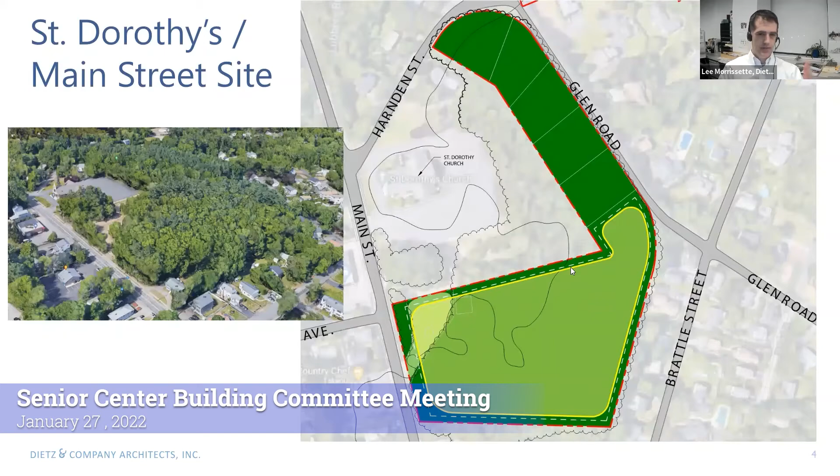As a reminder, this is the preferred site test fit that we did. It's up on the street, on Main Street, with the parking behind it, internal to the site. The entrance is to the north, so up on the screen is north in this case. The entrance is to the north of the building, then swings around to the right facing east. There's an exterior patio space facing south and some blocked-in potential for outdoor activities adjacent to the building, as well as adjacent to the parking. This is really just a test fit, so there's future expansion potential next to the street as well.

I'm reminding you because we're going to zoom in and keep the orientation the same, so up will be north and right will be east, and so on as we zoom in. Just keep the site in mind, because the screen's only so big—we can only fit so many things on.

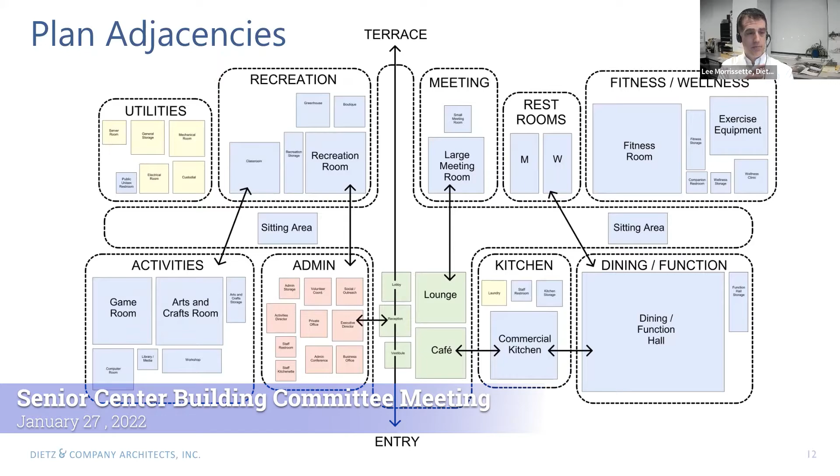So if we go from a loose association of spaces to a preferred association of spaces, we now move into something that begins to look a little like a building. So we have two plan diagrams, deliberately named number 1 and 2. It could have been A and B, and we'll make more, but just to keep track of which one's which, we have plan diagram 1 and plan diagram 2.

The spaces you see here are colored like we talked about, and are actually pretty accurately sized to that plan diagram from the summary of spaces before. So we've begun to group things, and I think that's something to note.

So we've begun to group spaces together based on the plan adjacencies we talked about previously. For example, the fitness room and the exercise equipment room both have their appropriate associated storage rooms within them. For the purposes of easy design, we've grouped all of the support spaces together. For example, the kitchen has the kitchen's office and storage and that kind of thing.

And so forth. As a result, we can begin to think of the plan as kind of four things, really, maybe five. One, admin, a suite of offices, has conference rooms and office space in it and all that kind of stuff, but it's really a chunk of administrative space.

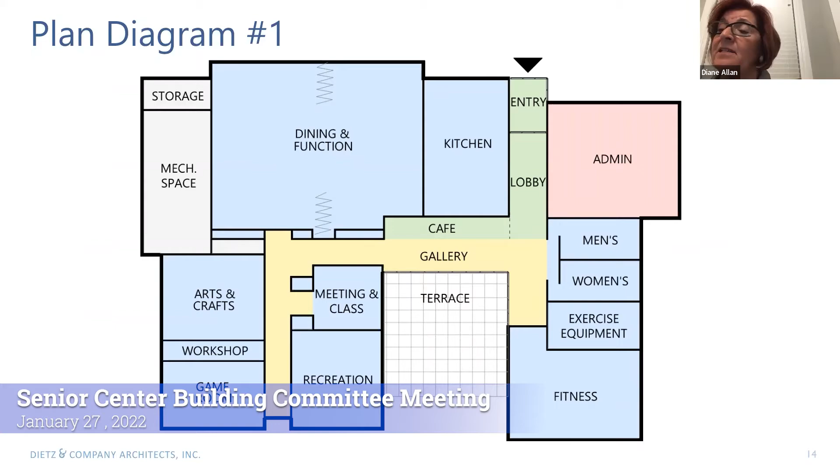That's for sure. So the other thing I'm thinking about is with this flipping of the dining and function area there, especially if you have a large crowd, it's going to be perfect where the restrooms are right across from it. And rather than, they seem to be a little more centralized in plan 2 than at the far end, where if you're way down at the game room, you've got to walk all the way down to the end. So they're a little more centralized there.

And one other thing is I was looking originally at the original plans we were given here, and we had asked for a scale here, and the scale on it just doesn't match up. I'm trying to visualize the size of this building, and what you had here, the 1 inch equals 200 feet, doesn't quite match the bar scale at the bottom.

You're absolutely right, and I do apologize for that. It was a last minute oversight. We did this plan so it fits on the screen and maximizes on the screen. We can put a graphic scale on there for when it gets printed out. It was an oversight, we will definitely fix that in the future.

And we don't have any doors. Sometimes doors help, or stairs, because we know how wide a door or stair is, and so we left you adrift there unintentionally. The best way to describe it is, the space between these two walls going into the bathroom is about 4 feet, so that's a little wider than a door. This entry vestibule is about 12 feet wide, and this yellow section here is 12 feet wide. That doesn't really help, but we'll get a little more thinking on the dimensions of the building, Diane.

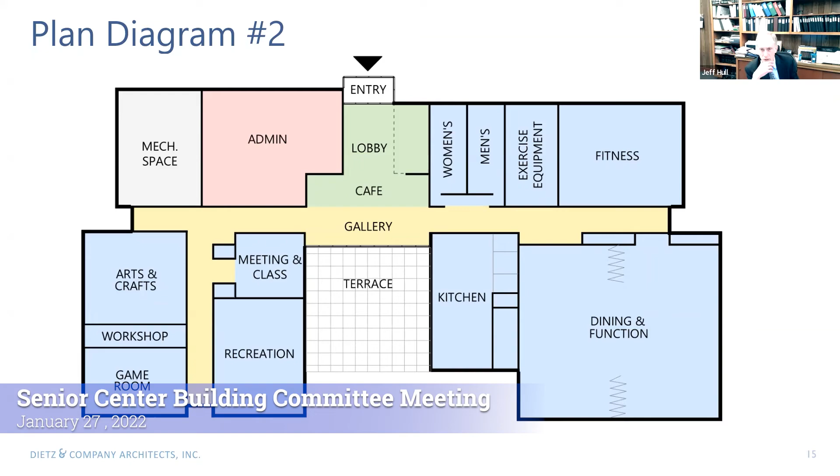I completely hear you, Jeff, and I appreciate where you're coming from. Nothing bothers me more than historic renovations of old, beautiful buildings where they put the front door in a weird place just so you can easily get to wherever they put the elevator. That's usually what happens, because old buildings aren't accessible for people with disabilities. So you find this: where can we put the elevator? We'll just put it off the back. And then the front door is just useless.

There are a bunch of buildings like that at the campus, the college I went to, and it bugged me. So I don't want us to end up with a really nice diagram where the front door is right onto the courtyard, but no one wants to use it because it's in the wrong place. For me, that's a fail. So we're going to work on this until we get the front door in a place that makes sense for all the uses, practical and aspirational. We're going to work on it until we get it right.

Now, having said that, this building is laid out with a bunch of things in mind that are hyper specific to the piece of land it's designed for: the orientation of the terrace being due south, the large dining room function being in the southeast, the recreation space being off the terrace, and the arts and crafts rooms. All of those rooms need daylight and sunlight. The mechanical space and admin space don't need that — mechanical doesn't need any sunlight at all, and the admin space can use northern light very efficiently.

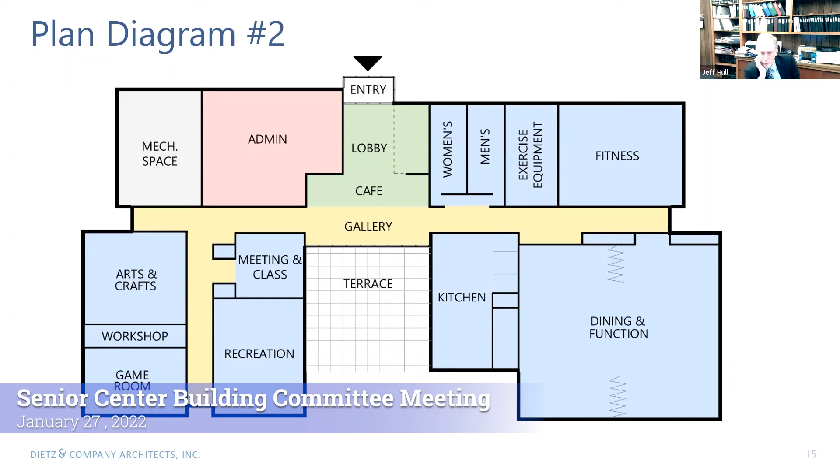Yeah, I believe the suggestion was raised at one of our prior meetings, that there was a desire to see the ability for a space, probably the function space, that could be separately opened up without opening the whole building for other groups in town. Similar to the use of the July 4th building, where various non-senior center groups could go in and have the space scheduled, presumably through Terry or her office, for certain nights of the week for a meeting or some kind of function. I distinctly remember that was posed, and I don't remember how we addressed it as a group here.

Well, didn't I know that in the town hall school administration building, that was definitely brought up as a community room, because Kevin Kyra said there are a lot of meetings that can't be accommodated at the 4th of July building. We were going to work on that with the town hall / school administration, because they had a lot of conference rooms there.

I thought we were kind of ruling out any other social activities other than strictly senior functions here for the senior center. I'd have to go back in the minutes and look, but I believe it was the town hall. I don't want to get too much into that because I want to talk about it afterwards. So I don't want to monopolize the conversation here or delay further, we probably ought to just move on and take that up separately.

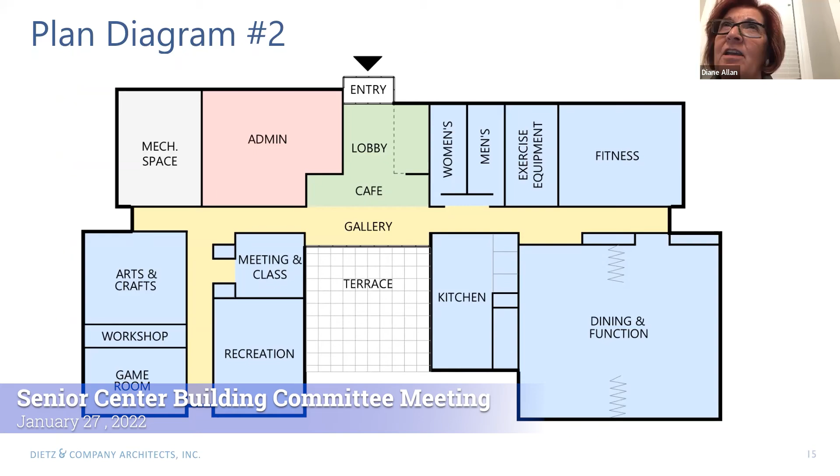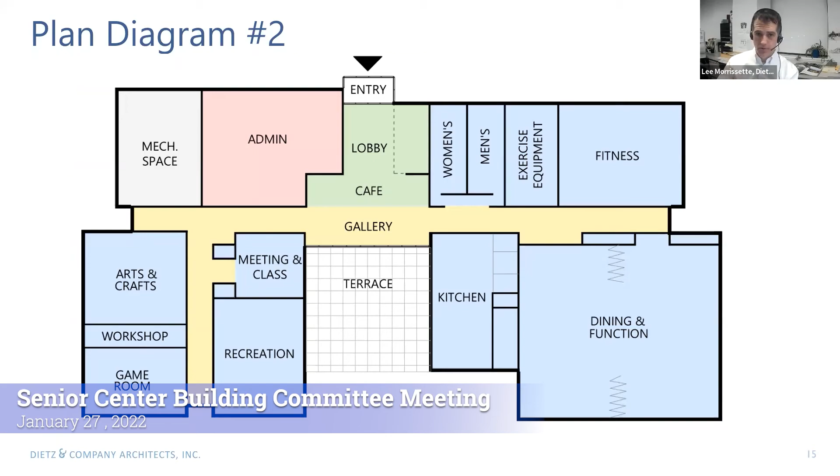Was there an option where the parking was all in the front and the building was more towards the back? There was, but we didn't go with it because it didn't offer a site plan that you liked as much.

Okay, because the circulation - you're testing my memory here. I believe the circulation for that one meant we went all the way around the parking lot before we dropped off at the front door, and it pushed the building very far back and compromised the outdoor space because you had most of the front of the site used for parking.

I believe the reason we went with this one was because of the preferred drop off and because it was a more flexible use for how much parking we wanted to take over. And it gave us a really good chunk, this big chunk of space right here in the middle of the lot that we could use for anything outside. So it was a better synergy of the building and its adjacent outdoor uses due to the shape of the lot, because it's kind of a funky shaped lot.

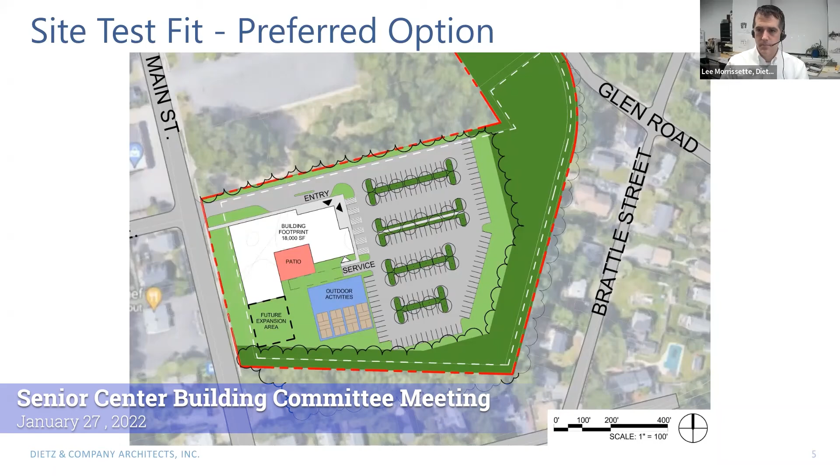Okay, I'm going to zip through to the next topic. Now we're going to take scheme 2 and develop it some more. So what's next?

For the next meeting, which is slated for the 9th - and I'm not going to get into the scheduling, I'll let the committee do that - we're going to talk about the adjacency and building layout feedback that you gave us tonight. We're going to work on the diagram and give you an updated version so you can see how it's morphed and changed. That'll be the first update, my reporting back on the design team.

The second thing will be a discussion of building volume studies and the preliminary building systems discussion, and those are 2 very different things. The building volume studies will be how big is it, what shape is it, maybe what kind of roof does it have, how does it look in 3D. Where's the big part of the building? Where's the small part of the building? That kind of thing. What does the courtyard feel like? So we'll be showing some 3-dimensional views of the building - preliminary, but 3-dimensional sketches.